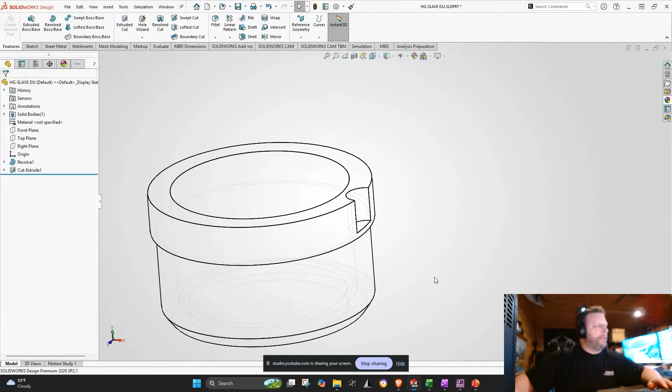Let's see. Circular. This might be a good quick AI task. I'd like to do 3. That'd be nice. How many pins do I need to get the torque I want without shearing them? Oh, why not do it on screen? Should update.

Hey, I have no idea what is going on with my camera, and I can't seem to change the settings while I'm live streaming. Whoa. That's weird. Nope, that's not what I want. I don't know why. It's totally fine if I'm up close. So annoying. It's okay, I'm ugly anyway.

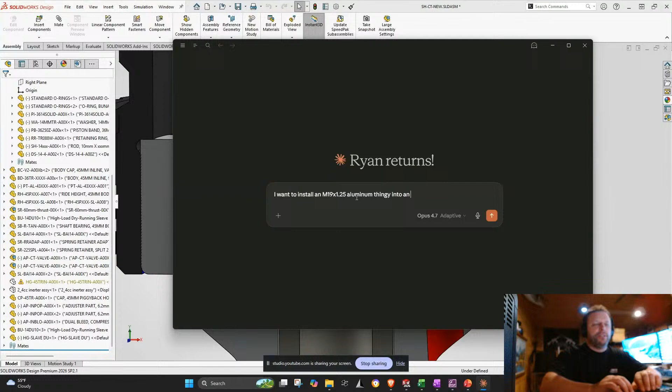So I'm going to say 12 kilonewtons. M19 by, we'll call it 1.25. Aluminum thingy into housing with, what did I say, 12 kilonewtons of pre-tension. The threads will have light lubrication.

How much torque do I need to apply, and how many, what did I go with? How many 3mm hardened steel pins do I need to make sure they don't shear? Boom. I have a calculator for this, because I've made many of these, but why not use AI, just see what it does. So I'll put 3 in there for now, and then do I have the right diameter for this? Nope, not at all. So I need a GGB catalog for DU bushing. How do you go about different ratios, or contact load variation, or what do you go for?

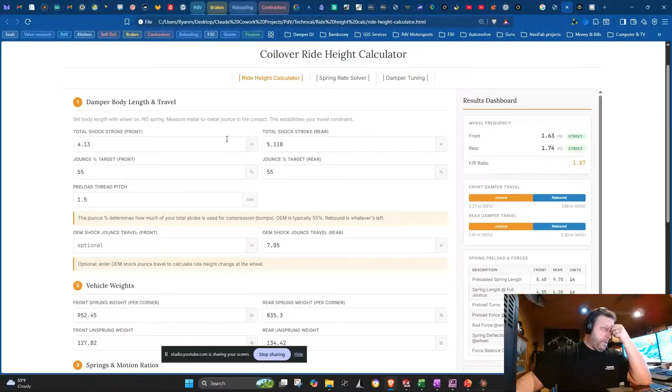And this page is really good for just setting up your spring rates. And then this starts to get into the damper tuning, so you can just play. This will be publicly available at some point soon. You can play with damping ratios, and it will generate your curve for you in real time. It's kind of nice. Hard to see. Yeah, there you go. So it's pretty cool.

And this again goes to just, there's a lot of philosophies on what damping ratios are appropriate, and it really goes to every single car. It's going to be different. So front wheel drive, rear wheel drive, all wheel drive, where the mass is, how low you are, all of that stuff. What tires you have, or what tires you want to tune for, even if you change them for street and track. And ultimately, there's a lot of compromise.

Unless you have a strictly dedicated track car and you're very consistent with your tires year to year, or at least between tunes, you're compromising a lot, no matter what you do. So it really boils down to some conversations you have to have with whoever's tuning the dampers around what you really want. And there's a lot of philosophies out there, and you may be working with somebody that's really good, but you don't like the way the car handles, and you just have to find a different guy that has a different philosophy about how to do it.

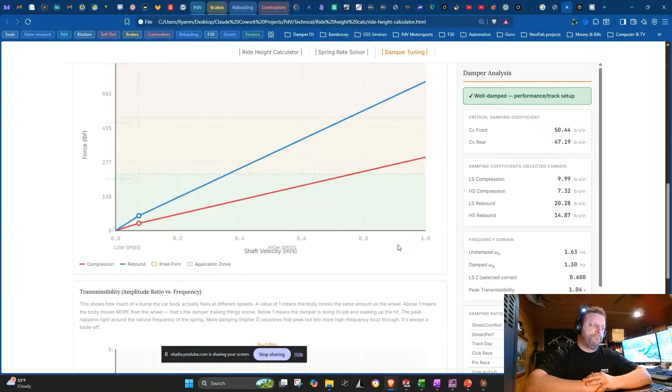And I obviously have to use my judgment on whether it's working well or not, and that's a good curve. But that's ultimately what I would like to be able to do. And then that curve feeds directly into the dyno software, and I literally just have to match it. And ultimately, that's the end goal of where I want to be. Yeah, hopefully that answered that.

I need a GGB catalog here. Somewhat. Okay. If you wouldn't mind sharing, how are you calculating transmissibility with asymmetrical damping ratios? It's mathematically difficult. Oh, I haven't even looked at that. That's pure AI. I don't even think it's calculating it right, because the curve doesn't look right to me. So this is not available. It's not posted live or anything for anybody to use. I have not reviewed it at all.

So it was actually totally abandoned, because I basically got no feedback on it when I shared a little bit about it. And then I just heard today that people that saw it were going to that person asking for it, but they weren't coming to me. So I had no idea people were actually interested in it. So I'm going to make it a priority once I get these designs out to go through it all and make sure it makes sense. AI will definitely give you garbage, that's for sure.

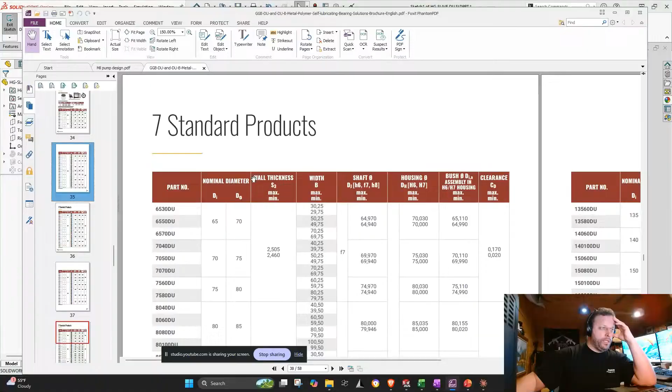No. Where is my note? There we go. GGB. Okay. These are metric. Yeah. So I need a 1410. 1410. There we go. 14.10, 16, 16.018. Is that right? Yeah.

I'd rather show. There we go. Okay. Then we have a handy dandy thread calculator. I'm going to do a 19 by 1.25. 18.866. And the minor is 17 point. We'll call that.

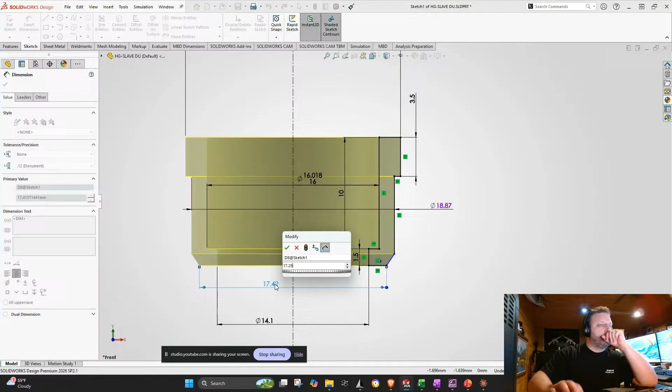Now, let's see, when you say 14, is that a full dynamic sim or just virtual sim type situation? So what it doesn't have is steering, and I don't really need that because I don't have a crazy tire model, so that definitely becomes pretty important when you need steering. So this has tire, spring rate, and damping. Obviously, the damper, spring, and inerter per corner. Then it has heave, pitch, roll.

What else does it have? Does it have anything else? It doesn't have any roll bar. I can easily add that, but I don't have that in there. I feel like I'm missing something. But yeah, I think that's all the degrees of freedom.

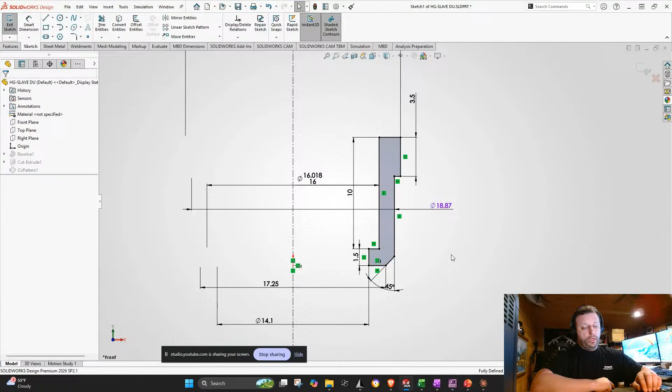And the whole point of that is that I can correlate the internal pressures of the actual damper running that track data to my hydraulic model, so that the hydraulic model performs exactly like their damper, and the inerter and the spring as well. I'll be pressure tapping all the areas around the damper to then adjust the parameters of the hydraulic model to match under the same scenarios. So it'll ideally be an almost perfect one-to-one. My simulation will mimic their track data.

So I actually don't care about this in terms of tolerances. I care about this. And I need to look this up. Leave that there.

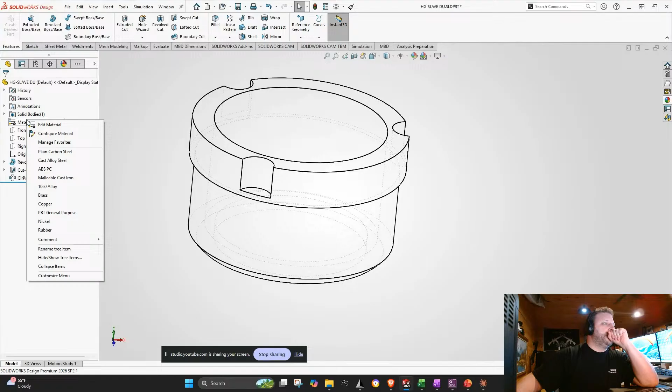I think that's pro. Yeah, I should do 10.1. We'll see. That's good. And this will be 60. Call it.

We'll go with that. I'm going to go with that because it is slightly better on thermal expansion, which would actually keep the contact with the damper more consistent and control a little bit the friction at higher temperature. All right. Okay. And I need this guy to have the same thread.

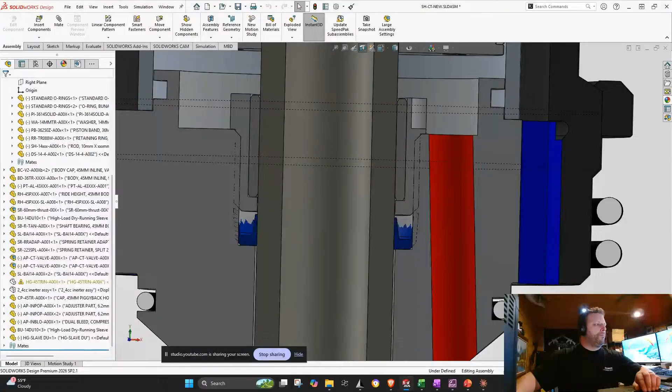Let's see. Okay. All right. Here's my thread. Well, that's going to have to change anyway. Did I make this? No. 48.1. 48.1. I should have no problem coming in. Ooh, actually. Hmm. 3 mil radial area. That's okay.

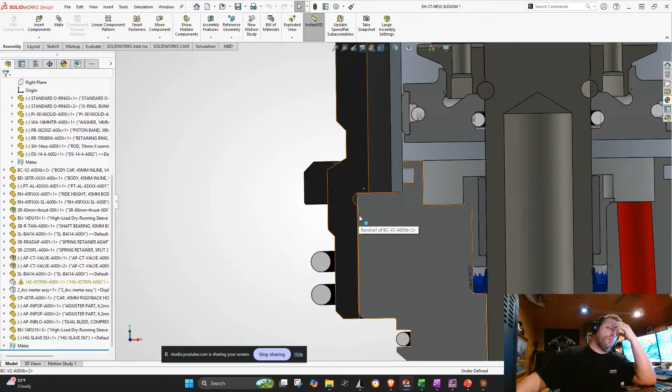Where do I want to go with this? Hmm. One and a half. Might have to change that later, but I'm going to go with that. So that's M48 by 1.5.

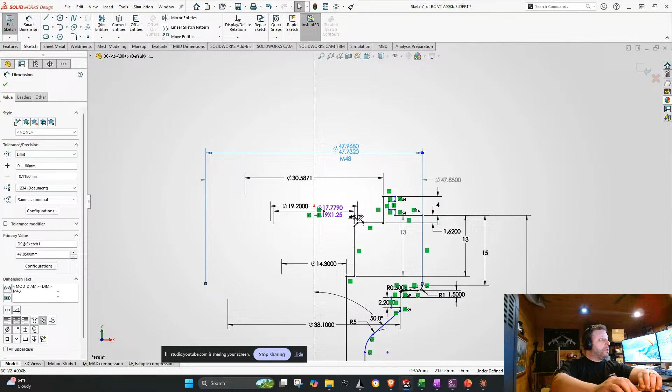Max 47.85, so 0.118. Yes. Bingo bango. M48, 1.5. All right. I need to start looking at O-rings. Okay.

All right, we're going to call this one, ooh. You could see my file names and see the customer. Not good yet. Can't announce that. Let's see. This will be PR year. There we go. All right. I have a very thorough calculator. Where'd it go? Where's SolidWorks? What the hell? Okay.

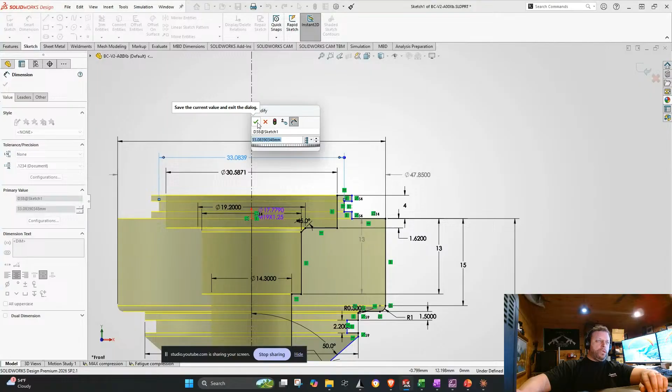So I initially just roughed these in, and now I need to figure out what actually fits. So we'll leave that there. So 36, and then this is going to be dictated by the tube, and the tolerance on that. I wonder if I have that in the model already. Nope. Shit. Yeah. Oh, where's that tube? There we go. It's gonna be minus 0.03.

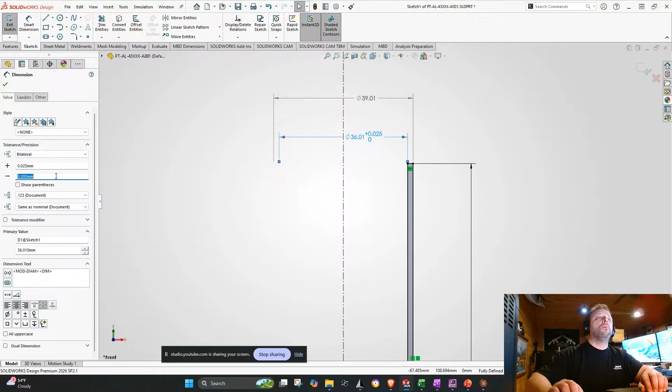That's tempting. 38. We'll go with this one for now. 36.01 and plus 0.025 and 0. So then I need that in this guy. So this is a piston, yeah. Nominal 36.01. It's not symmetric. 0.02, we'll call it.

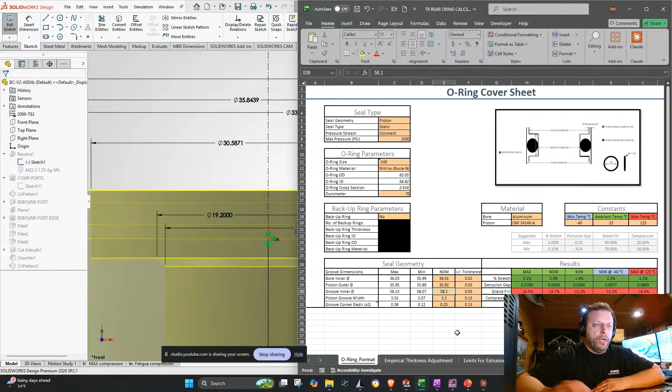Groove inner now. So start. Whoops. What am I doing? Totally backwards here. 34. And let's just get this closer. ID's 56. ID's 7. Too much. 25. 32. Getting there. Stretch is, that's pretty good actually. I think that's a winner.

So then, compression. Oh, gotta make changes. Okay, so 20. Well, let's see. There we go. 20s. It's too much. 1.9. 14 minimum. 22 max. Yeah, push it. 31.7.

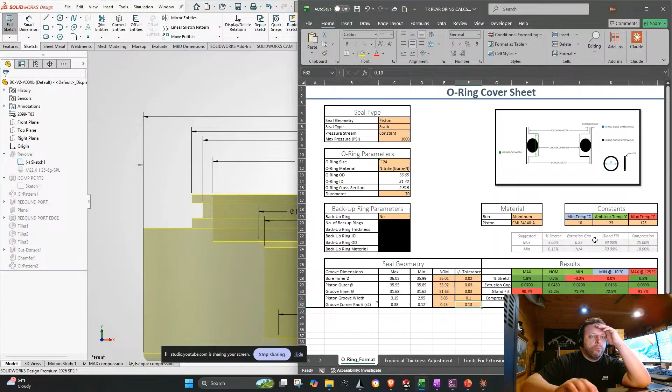Oh, the max is based on the nominal, which means max at 125 is going to be even higher. That's pretty high. 3.05. Yeah, there we go. Okay, 0.01 on the width is fine. Groove radii 0.13. Okay. So that means 0.13. Okay.

It was 31.65. Oh, shit, it's more of a difference than I was expecting. 0.03. So is it fair to say damper friction causes random micro tire contact load variation that could lower your steady state grip? Yeah, absolutely. Definitely.

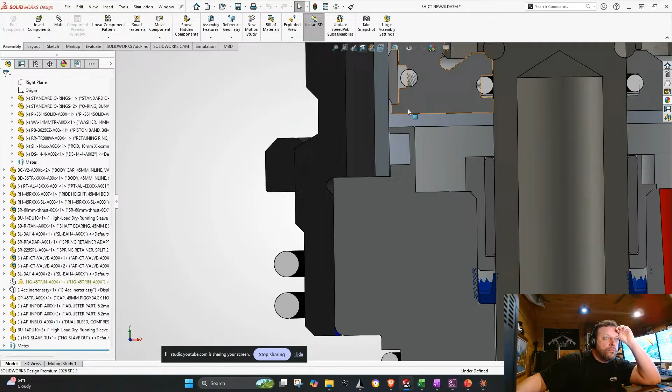Oh, this isn't tall enough. Shit. Oh, that's not good. Fuck. Not good. Not good. Oh, shit. Come on, you little bastard. Fuck, that's not enough. I need to lower this whole surface. Shit. That's painful.

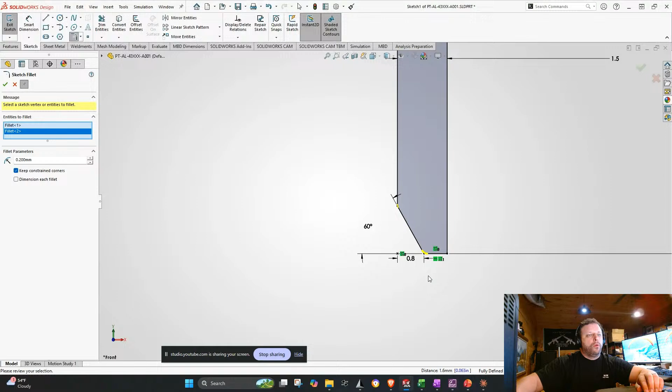Whoops. Oh, shit. There. Just half a mil. That should be all right. All right. OD is 36.65, which is right around there. Okay. Yeah, it's fine. It'll seal.

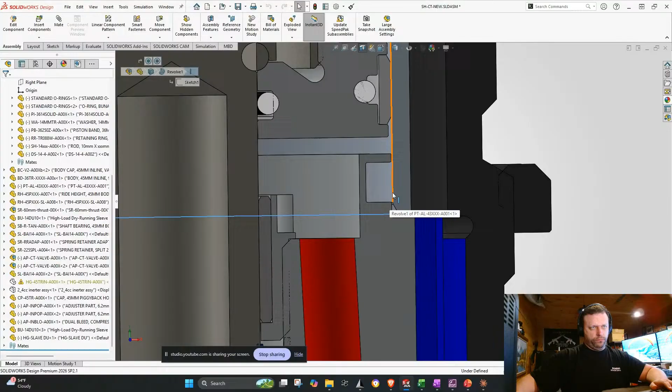That is 0.6 and 0.35. That's super annoying. It's totally backwards. What the fuck? I want that one. 0.6 should be the same. And 0.6, 0.35. Okay, now we're the same on both ends. Save. And then that is a 124 O-ring.

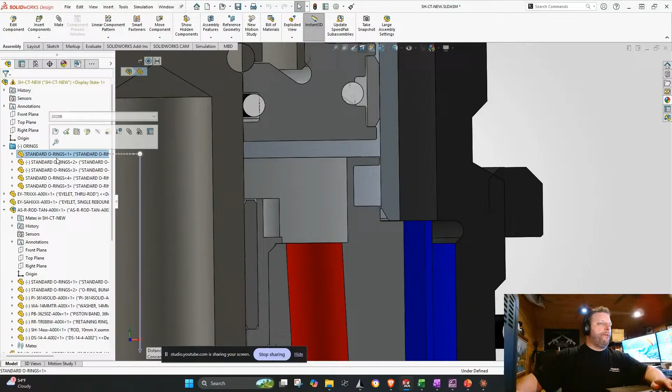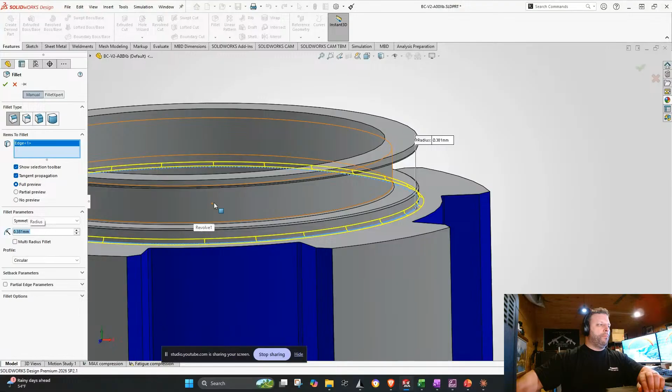Nope. Yeah. There we go. Yes. Oh, I just forget what this is. 538. I'll have to know what the standard tool nose radius is for metric, because I doubt it's 0.381.

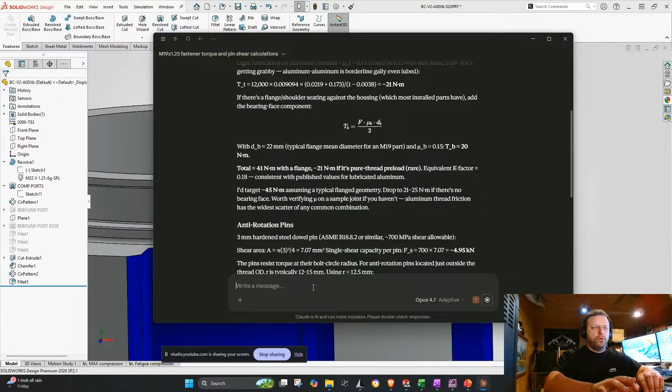What was I doing? Oh yeah, tool nose radius. What is the standard metric mill tool nose radius? A lot of years of designing shit and not knowing this. Oh, they round up to 0.4. Okay, that's fine. 0.4 it is.

Yeah. Was that enough for the chamfer? Yes. Okay. So that makes one O-ring. This is inner tube. The next one will be, I don't know. Oh, I'm not ready for that one.

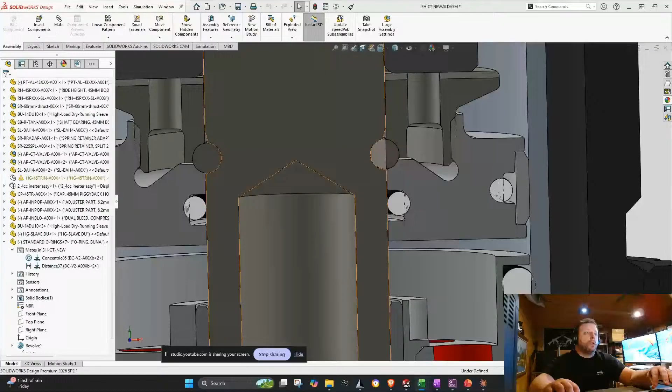Oh, this piston seal. Rename. Piston ID. So that is roughly 14 millimeters. Yeah. Piston. Whoops. It's not a piston seal in a piston, it's a rod seal. So rod outer is 14. Bore inner is 8.1, I'll say. And then see where we end up here. 17. Okay. Wow, that's pretty big.

Now I need to go down to 25, 20, 70. Stretch. Oh, what am I doing? 13, okay. So there's a little bit of stretch. And then this will probably be too much. Yeah, that's annoying to install. And again, this is sealing pressure across the piston, so it's not catastrophic for leakage.

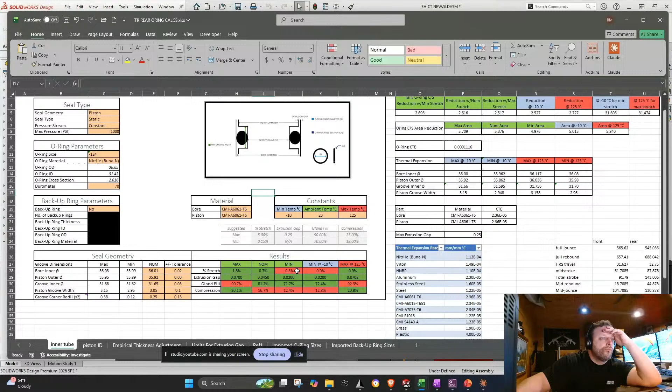Oh shit, totally forgot about this. So this is going to be the bore of the inner tube. Both of them are aluminum. Aluminium 2.3 versus 2.36. Yes. 2.2, so that's not 2.3. They're both going to be closer to 2.36, which is 6061. Okay. And we lost our min stretch. Shit. That's annoying.

31.7, 31.8. Damn it. CTE got me. I gotta redo this. 31. Okay. Oh, good. I can make this smaller. 0.7 to 0.02. So 2 is fine. No, that's not good. I gotta make this bigger. Shit. 3. Oh, that's annoying. Fifty thousandths matters, I swear. 50 thousandths, 50 micron.

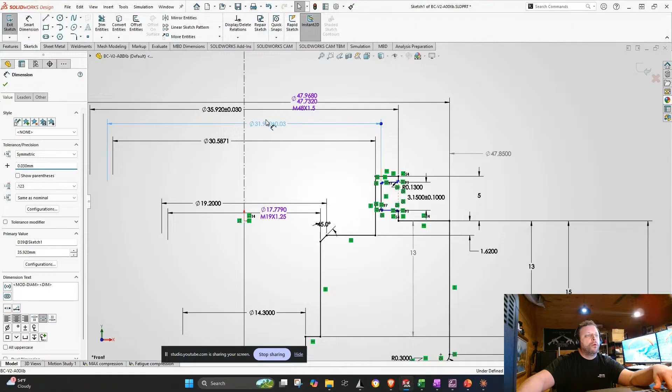Okay, so it's a 124 O-ring, which is still what I have. 124. And 3 point. Oh, why do I have that already? I made a mistake earlier that worked out in my favor. 31.9. Plus 0.03. 35.92 plus or minus 3. Oh God. Okay. We got our thread, we got our seal.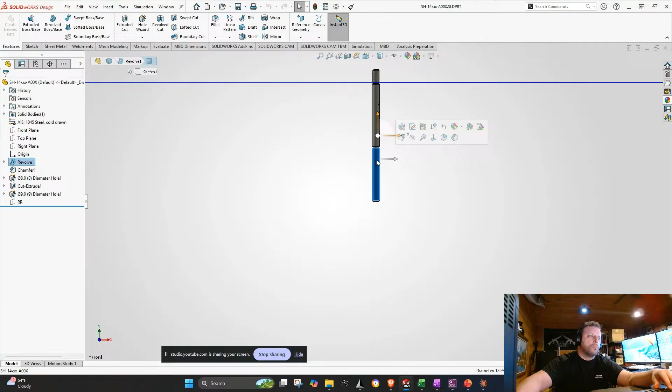That's good. Now, a rod seal gland, that's a good one, yeah. So, back to this. So the rod is, what is the rod? Nope. There it is. 13.984, 13.966. 13.97.

That's a new question. Yeah, you're back. Have you seen those dampers that build effectively inertance by connecting a mass to the low speed bleed assembly? Do you know of anyone who has done anything like that for automotive use? So the damper that you're looking at on the screen is a hydromechanical inerter. I'm just hiding it right now. I don't know what you mean by connecting that mass to the low speed bleed assembly. I've never seen it, and I don't even think that would work, but I'm open to being wrong.

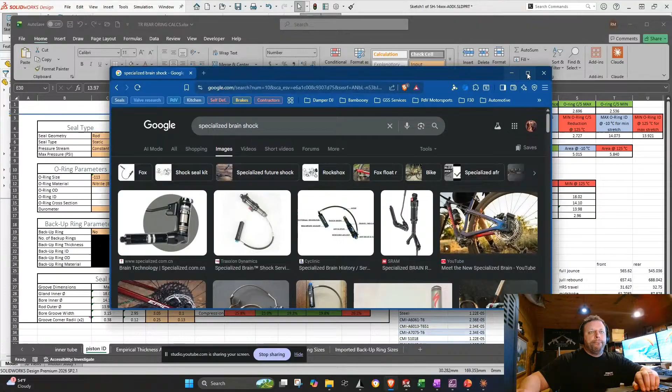984966. It's called Specialized Brain Shock. There's a cutaway on Google. All right, let's take a look. Specialized Brain Shock. Is this it? Brain fade adjust. The cutaways of the remote reservoir assembly that sits in the unsprung mass. Manual lockout levers, internal inertia valve. My marketing lingo red flag is just waving real hard right now.

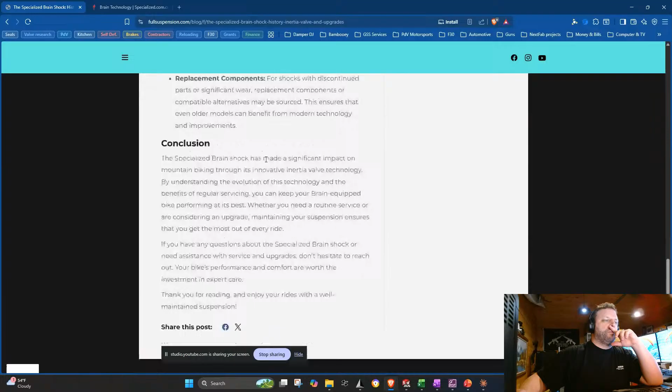All right. Spring-backed brass weight and hydraulic damping system designed to react to forces encountered by the shock, controlling the flow of oil within shock internals. So this is an inertia valve. It's not an inerter like I understood your comment to be. Penske had put some of those out for high-end customers, and they work pretty well as far as I'm aware. I was never the lead designer on any of that myself. Whether or not theirs works, I don't know.

Your question was: the needle is closed effectively, is the force varies based on acceleration rather than velocity? No, it's not like inertance at all. It's just an acceleration dependent valve, is probably how I would describe that. It is dissipating energy, it's not storing energy. The energy in the spring is just changing the performance of the valve, as opposed to the inertia actually storing energy at a rate relative to the acceleration rate of the ends of the damper.

If it's an inertia valve, it's acting based on the acceleration of the valve itself relative to the rest of the world. So if you just take that shock without moving the ends of the damper and shake it, you should move that mass on the spring, and that's not an inerter. It's cool. I like them. I think there's ways to utilize them that maybe aren't being done. I didn't even know they were doing that, although I've heard of that in mountain bike shocks before.

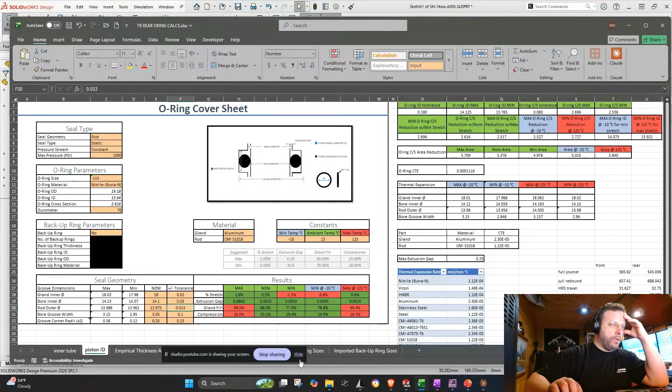What am I doing here? Where do I want to be? The rod, 984 to 966. Oh, that's not right. So I'm going to come 4 up. No. Opposite. 0.0. Where was I? Was that 9? Yeah, 9. So 5. 13. Oh, what am I doing? 984 to 966. Oh, I'm making this so hard. No. Plus. Go away. There we go. Okay. Go 5. Yeah.

There we go. Bore inner is wherever I want it to be. So 14.1 extrusion, yeah. 082 to 043. And the other aspect of this is centering the piston really well. So we'll go with 8. Yeah, that's fine. Then where are we at here? 25 to 19. So we can go 20 to 13. Yeah, that's pretty good. 112. And my gland fill now is pretty good. Okay.

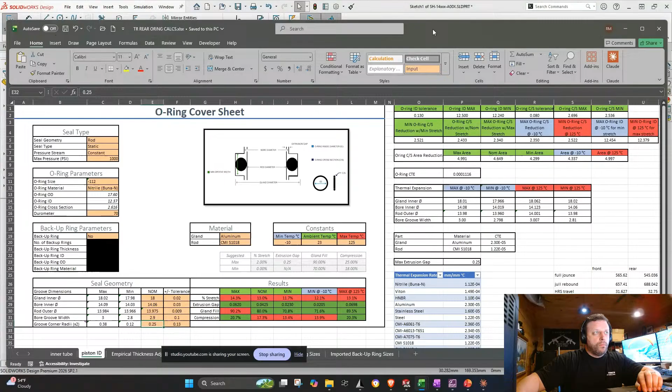All right. I'll walk through this a little bit. So this is my attempt at making a through rod that is high volume production capable. Most through rods that I've seen have a thread or some sort of need for a protrusion above or larger diameter than the chrome. And what that eliminates is the possibility of through-feed centerless grinding on your chrome, which is unacceptable for high volume production.

Ultimately, I want this company to have contracts with small OEMs, maybe like Bugatti or, I don't know, you name it, Ferrari. I'll never get on Ferrari, but for different reasons other than capability. But at that type of volume, I would still want to be able to process this efficiently, which means you would want your design to be through-fed, centerless ground for consistent quality and speed.

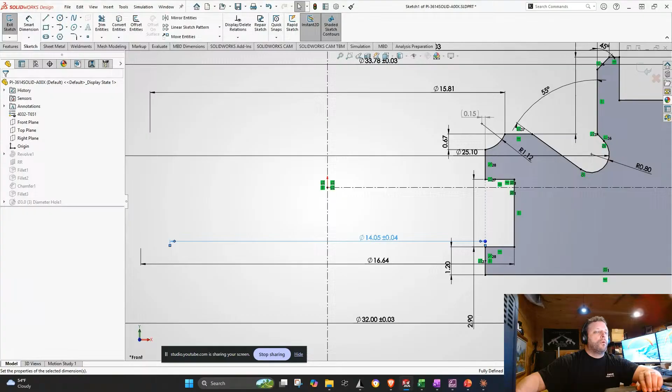Man, I feel like you're trolling me. You're not from Australia. That's a story I've shared at my day job now. Yes, I've definitely heard that. They used to have bladders that they would fill up. They'd put the car on the truck and then fill up a bladder underneath, and that would keep it from bouncing as it's traveling on the truck. That has happened. I actually found the website where they sell those bladders before, and I think they're out of business. I don't think anybody does that anymore. I've never heard anybody talk about that ever. I swear you're somebody from ClearMotion.

18. Well, it's not going to help my stress problem. Oh, that's way too much. What's going on here? It's way too much squeeze or stretch.

Definitely not, but maybe there are a few degrees of separation. Maybe someone from North Carolina. Yeah, it's real, or was real at least. I don't know if they still do it.

How did I miss this? My stretch is all messed up. Ooh, that's a big jump. So that's a 12.37 to a 13. Holy shit! Sounds like I need a metric O-ring. That's calculated, and I think I can get the same size roughly. So if we went 13. I don't think there's a 13.5. 13.9 is nothing. Is there a 13.5? The store, yeah.

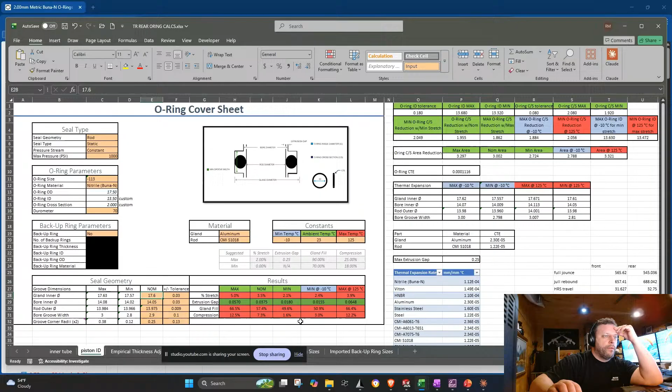Oops. Nine. There we go. That's not bad. Gland fill, so that comes down to 2.8. Nailed it. 0.4. So there's the rod. There's the extrusion. 17.2. 3.5% stretch. Reasonable compression. Okay. I shouldn't call this custom. It's off the shelf.

Okay, so 2 mil. I kind of have to figure out if they actually have a 13.5. That'd be smart. Oh, shit. Nailed it. 89,000 in stock. I will buy them all. Might as well start building my order. All right, so then that's 17.2 plus or minus 0.3 and a 2.4. Nice. Get some material back. 72, 1405. Oh.

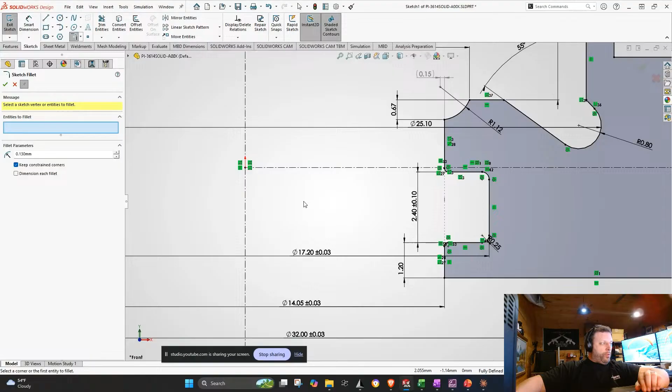What do you think about this? This has got to be boring as hell other than when you're asking questions. But that's why I'm doing it. I would love to have more people just to chat with while I'm living in my office, avoiding my family.

That one. Yeah, might as well. And yeah, might as well. Oh, damn it.

You're designing the FSAE car right now?

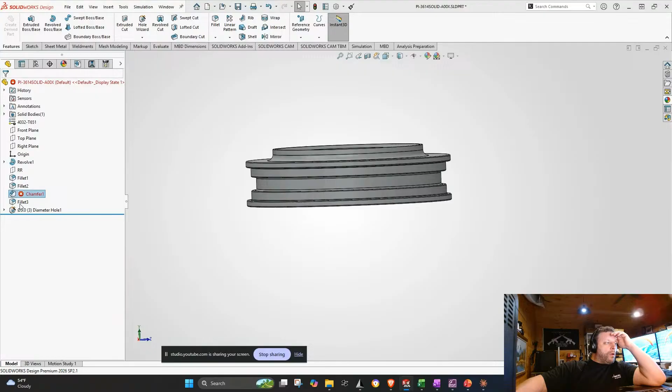Oh, I should leave that as a chamfer. Faster to cut. Chamfer. Yeah. Those two. Do that. All right, O-ring number 2 done. Let's do copy. What are we doing next? Ah, small task. Oh, shit. I don't have a 13.5 mil O-ring modeled. Oh, nope.

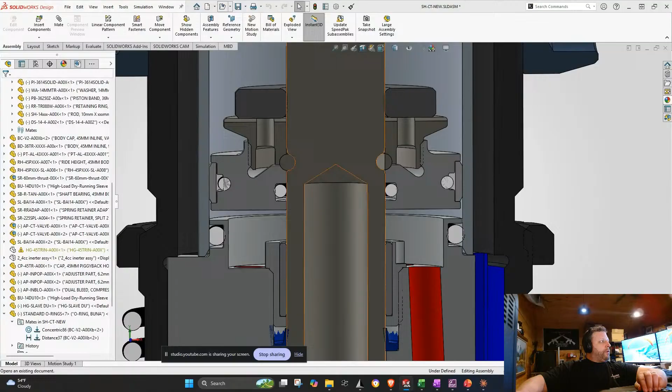O-ring standard metric. Yeah. What do I have? Ooh. Okay. 2 by 13.5. And this is not in order. Look. I don't think that search is working. And that's why it's 2.0. I'm staring at 2.5. Is the search? Okay, search works. So 2.0 by 13 doesn't exist. Okay.

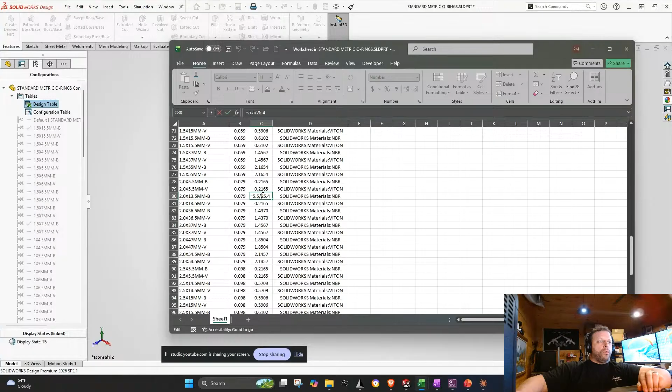Throw it right in here. Yeah. Very nice.

Yeah, that is something that's. I wonder if I can. Well, obviously I can't, but I wonder. Well, actually, so how's the CNC plotter work? Is that like a roller that's CNC controlled, a rolling cutter kind of thing? I don't even know. Like a Cricut. What the fuck is a Cricut? Cricut. Smart. Yeah, I'm trying. Okay, I get that. I'm trying to picture what the actual tool shape is. Yeah. Okay. That's cool. Yeah. I'd love to do it, but I also don't want to do the work. But yeah, I get the latest stuff does make it a lot easier. Okay.

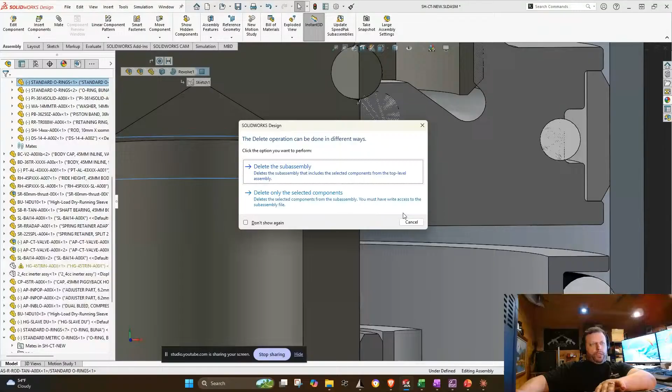Don't. I can't do that yet. I need to bring this fella into the rod.

For transferring a horrible time. Yeah, for sure. F wet layup. I remember the guys on the team doing that just for the, I think they did more than one layer, but just the skin of the car. And then they would do, I don't know if you call them stressed panels. We called them stressed panels, that honeycomb between two sheets that we then pulled the tubes together, glued it, and then let the tubes go, and you actually induce stress in the honeycomb wrapped carbon. It's not sheet, but whatever you call that. But yeah, they did that with wet layup back in the day, and that was painful to watch.

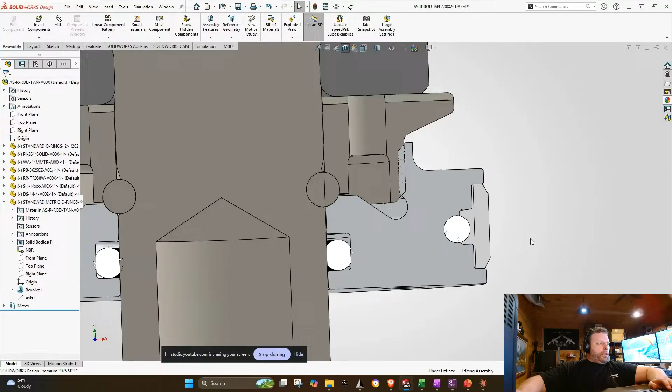Okay. Where'd my O-ring? Oh, there it is. Uno mille. Good enough. Ooh. Looks like more squish than it should be. 13 and a half. Oh, is that? No, that's right. Calculator doesn't lie. Something's not constrained. Oh shit, that's why. Oh fuck. I designed this thing in a way I didn't mean to. Oh well.

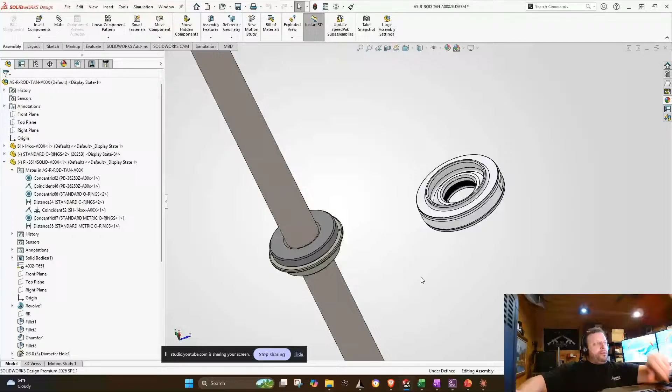There we go. So now that's constrained. Why is it that constrained? Oh, you son of a. What? There we go. Oh, jeez. What is happening? Piston band, O-ring, shaft. It's CAD tricking me. Okay. There we go. Now everything's constrained correctly. This is good modeling practice. I hope you do it as well.

Shit. What is that? Yes. Solid main. Okay. Uh-oh. Something shifted. What happened?

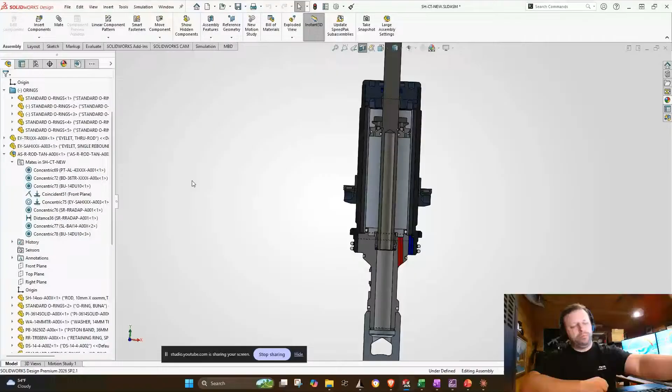It's going to be a lot of time, so I don't know if I'm going to do oils like an Öhlins oil, because they're not going to tell me anything that's going to help my inerter, because their oil is not going to be so different from any normal shock oil. What I ultimately need to find out is if I need to do something other than a typical shock oil to enhance the performance of the inerter or get it to survive longer. I don't know if I'm going to end up with a boatload of cavitation at the pump that breaks the oil down too fast or something like that.

So I'll be doing a shock oil shootout on the Emma Dyno at some point this summer with hopefully a whole bunch of donated oils, and that'll be fun. I got to have enough dampers, but I got to make a plate, and I'm going to do probably 4 up, maybe 6 up. So there'll be 6, hopefully identical dampers running different oils at the same time on one dyno, and just beating the shit out of it, and hopefully get through that test quickly.

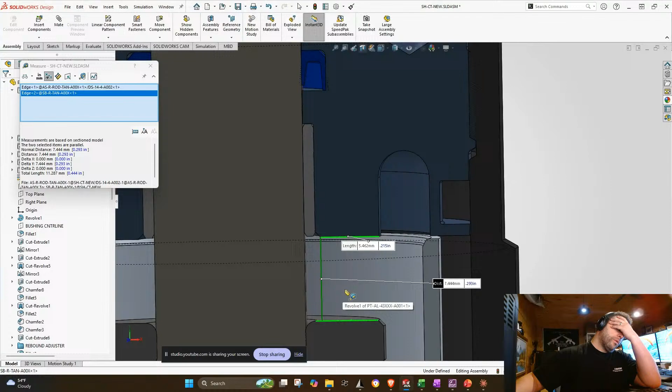Something shifted on me, and I don't know what. That is 387, 312. That looks right. Let's see. 744 is, that's 3.442, something like that. Too long now. And then got plenty of room there. There we go. 2 point. Yeah. The hell moved.

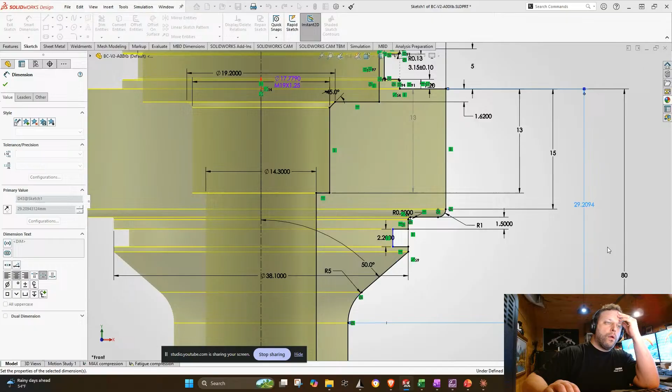Actually, that might work out well because I need to lower this anyway. That's too close. So if I could just take length out of this leg. Yeah, why don't we do that? Oh, why didn't that move? It's not mated correctly, that's why. That's going to fail. And now, yes.

Boom. Okay. Now I got to fix that gap. Shaft bearing's in the right place, and at full rebound. I'm not thinking about this right. I did not solve it. Oh, I gotta go up, not down. I need to go down here, and then that feature needs to go up. Plenty of room here. I wouldn't say plenty of room, but pretty precisely machined components.

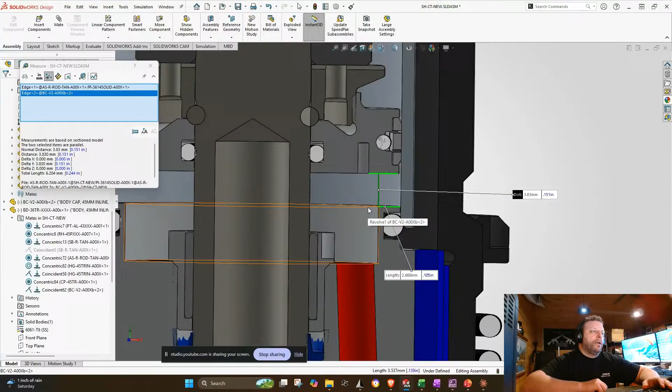Okay. Those are attached. Got a happy amount of clearance. And now we're too short.

Yeah, GPT. Very dangerous. Best bet there would be to just ask it for sources. I wouldn't ask it for its opinion.

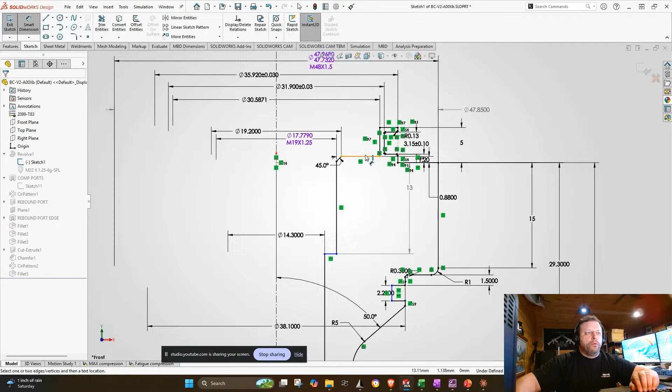So I'm going to go back up 2.5 mil, and then I need to affect something else. So this can come up 2.5 mil. That's a start. I don't think I want to do that though. 2.5 mil to there. Let's just see what happens. -2.5. Oh, that is terribly dimensioned. Yeah. All right. Okay, that puts us back to where I was.

And that gap's still there. And that looks... Nope, that hasn't changed. And where are we here? Oops. Back to 744. Okay. So now, you can see I dimensioned that to the datum, but that doesn't work anymore. So I need the seal to come up.

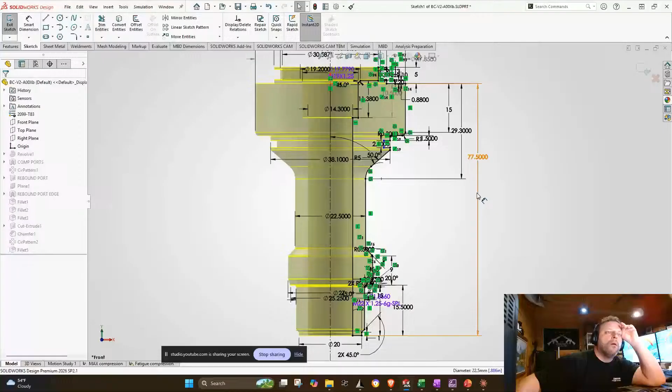Oh, I never put this back. We're getting there. That's probably safe. That's a lot of space. Oh, I believe. Where am I here? Back to that. That's not great. I just need to move the piston, I think. That's bottomed. That's aligned. I think I need to move the piston. Why do I have to move the piston? What the hell did I change?

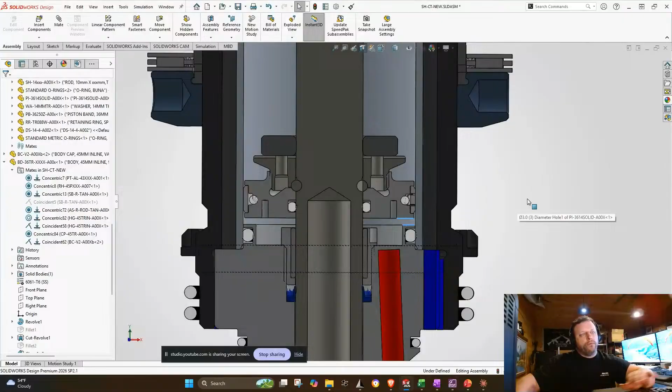So 744. What's the difference here? That's 133 and 744. So then I'm gonna do, yeah, 1 3. All right, it should be a little over 4. Oh, yeah, 4.3. Yeah, plenty of clearance. And yeah, oh, split it pretty evenly there. Okay.

What next? Guess I should make an eyelet. And I should make this fit the new shaft. Hmm. 1 second here. Oh, shit.

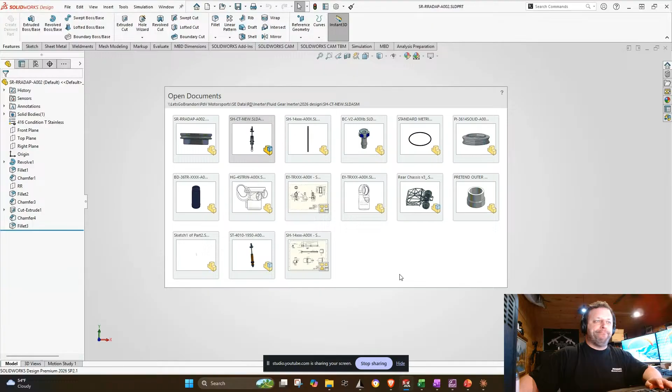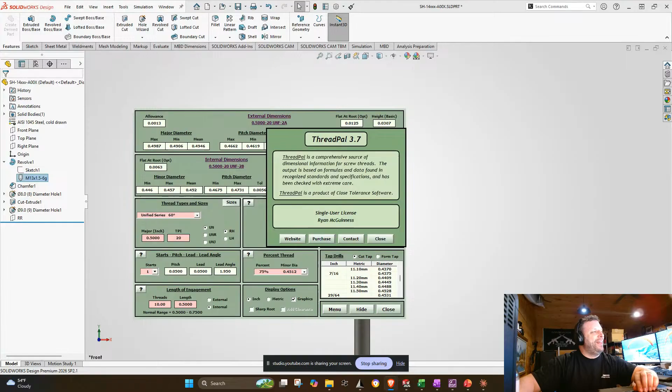Oh no. I was wondering when this might happen. I think they went out of business. Oh, that sucks. Expired domain. ME ThreadPal. I've been using this for probably 15 years. Every company I've worked for, I made them buy it for me. It's so good. Because I always do custom threads for the stuff I typically do. It might be, maybe they just moved away or somebody bought them. I can put it in the chat, I guess. There we go. That site works for some reason. Highly recommended. Super cheap. The whole FSAE team should have them.

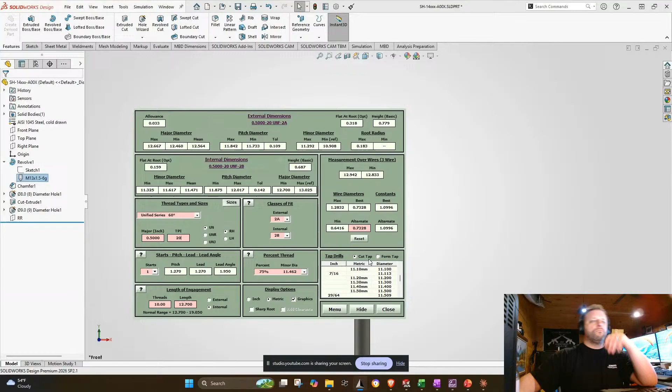My computer is lagging right now. Here we go. Yeah, 1/2 inch 20. Is that right? I just posted about this. I can't remember. I decided on it, I guess, and I didn't make the design change yet. What did I say? Oh, God. Here we go. All right. Oh, I did say 1/2 inch. Why would I go that small? It's pretty small. Certainly doable.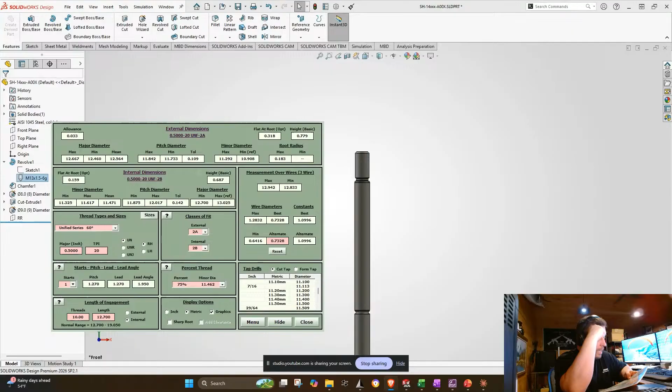Yeah. So M14 is called M14 by 1.5. And then the major diameter is under 14. 13968 is not small enough to avoid the centerless grinding of the chrome. Right, that's 13966. 13.9. Yeah, so you'd have to do a max. You still have plenty of room there. Yeah, we're doing a modified thread, but it's still an M14 by 1.5. Well, I can't say all go no-go gauges will work. It'll at least be a standard thread. Standard thread is M14 by 1.5 standard? Probably not.

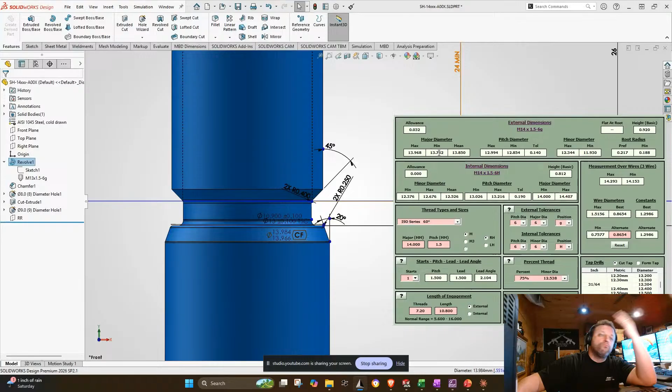Now, external, I could do. Nope, what am I doing? That's the pitch. That's not what I want. I don't really want that either. I'm just going to dial it back. So 13,966. So I'm going to make a max of 9. Max of 9. 13.9. Yeah.

What is that median? 13.9 plus 13.732 to 13.698 and plus, or 816, and then plus 13.9, so 13 plus... what am I? 13.732. There we go. All right. There's my special thread.

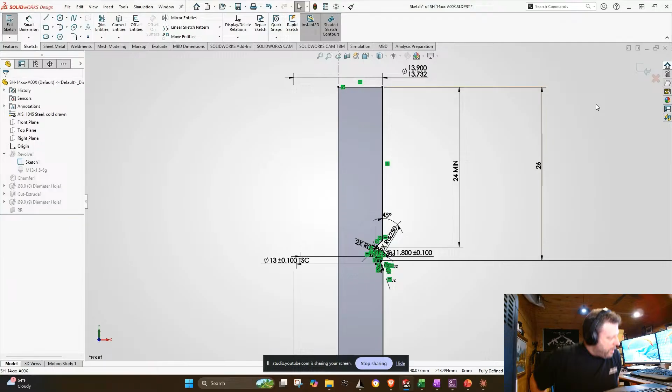That's what it was. I came up with a stupid custom thread, and the tooling that I'd have to pay for tooling to roll the thread, which is what I want to do. Now, even though I'm constraining the maximum major diameter, they can account for that and still use the standard M14 by 1.5 to roll the thread. So it will be a little less expensive for me than what I was doing. Awesome. And still have basically the strength of an M14, which is spectacular. Yeah.

Now that is M14 by 1.5, 6G rolled. Major is 13.9. I think you have to double check that mod. 13.90 to 13.732. Yeah, whatever. I gotta look that up. I'm pretty sure there's a specific format in ISO specs to how to write that. Okay. 1.5, 6G.

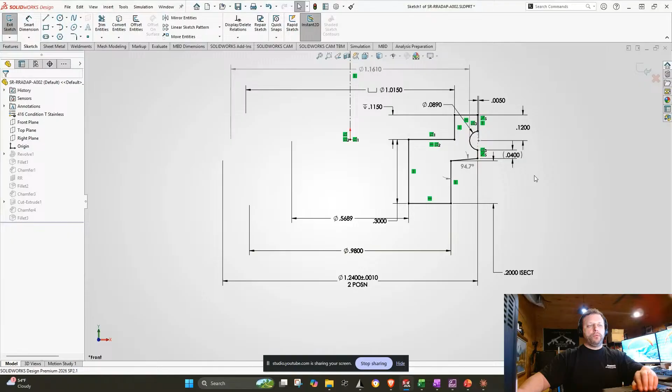Now, I can fix this. Drawing's already made for this. That will be nice. Oh, drawing was made for this when I worked in the Freedom units. So that will have to get fixed. Yes, dimension. Remove. Okay. The minor diameter is going to be... Come on. What is. That's the one. I don't know why they don't give me the median, the mean minor diameter in this software. I don't need that. I just need... Not for drawing.

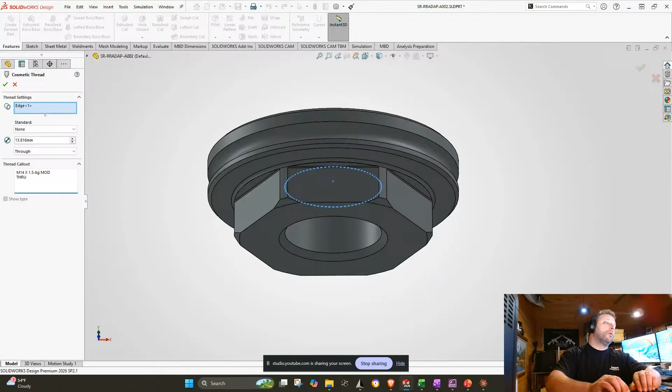Forget what I put. 13.9 plus 732 divided by 2. There we go. Ba, ba, ba, ba. My chamfers aren't big enough. Oh, what material? Of course, I closed it. 416. 416. I'll have to think about that. All right, that works.

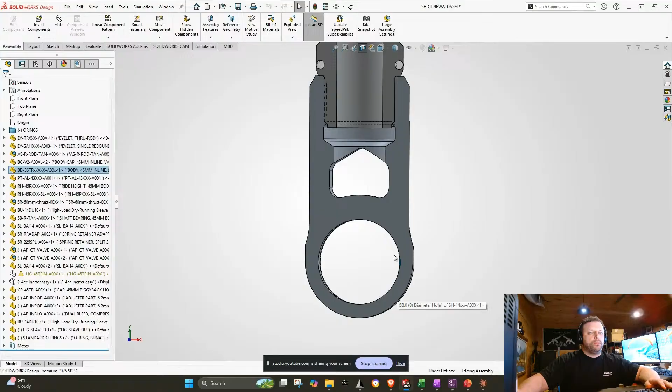To work on that. Now the eyelet. Let's see. This one is quite a bit longer than the other one needs to be, so that's 55.58. Oh, it's not that much longer. 50.8. Ooh, I could use the same eyelet. Nope, I can't. That's a totally different diameter. All right. It's a silly problem. Let's do this one here. This already. So there's the handy dandy calculator. This is going to be called...

I'm so used to day job active suspension called CP and VP, which is not what this is. Close. The fun part of making your own shit in a way that's never been done before. Well, I can't say never been done before. It's just a different design. I don't know what it's called. TBD. Think of something there.

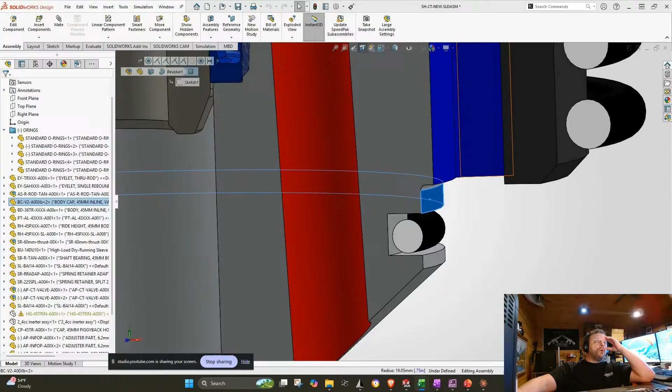So I know I can't change this. 38.1. So that's 38.1, and I'll make up the rest. 38.1. I'd like to go loose here to make it easier, quote unquote cheaper. So 38.1, and then the bore would be 38 point, I don't know, 38 point. Yeah. Okay, and then 36, let's say.

And, oh shit. This hopefully will be easy. Get this back to referencing the cells. Did that change? 17.12. Yes. Okay. 23. 31. This is another one that is just internal sealing. So I want low compression, high gland fill. Stretch is in the ballpark, so that's not enough stretch, so we'll go with that. And let's see. Oh, it's going to change a lot.

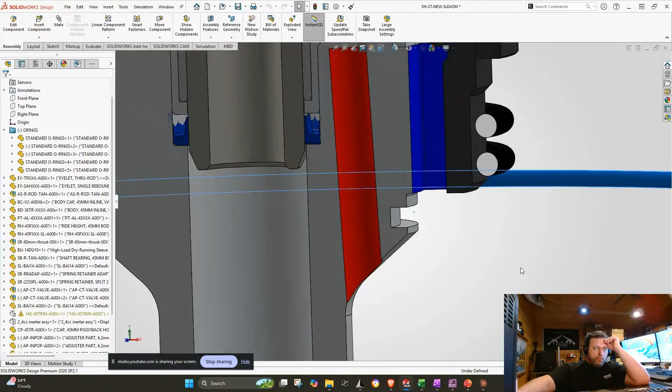Oh, these O-rings are bigger than metric ones. I should probably use all metric, huh? Have better control over cross section. It's annoying how big this gland has to be. So big. Let's see. So this is going to be a 21.25. Actually, 20. Who's that look like? Yeah. Let's go back to the 20.

Oh, 39? No. 34, 27, 33, yeah. So no compression is because this is 30. Let's go 35. Too much. 35. 35. Yeah, that's pretty good. Then that's a decent amount of stretch. That's the money shot right there. Gland fill now 2.4. Nope. 3. Yeah, it's such a huge range. 8. For sure. Okay. Good stretch.

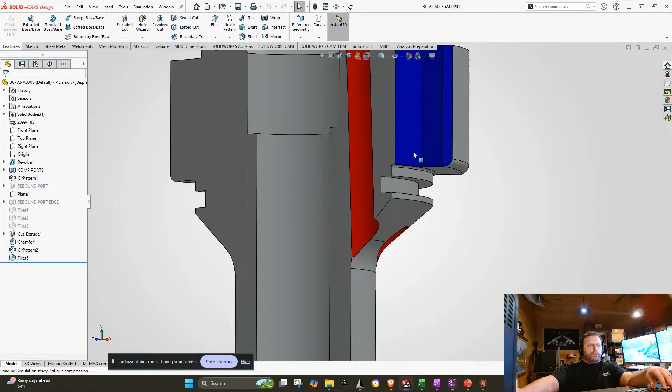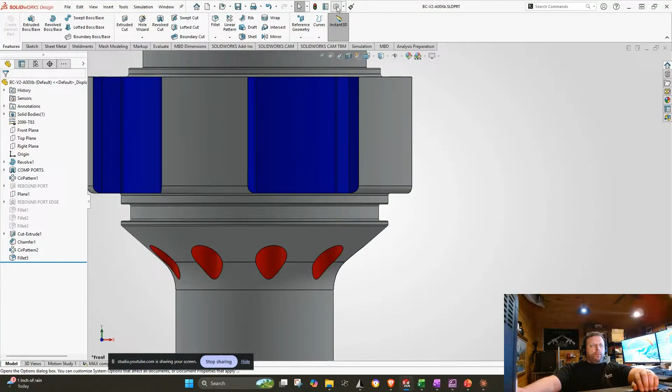Oh. Two point 3. Oh my god. What the fuck are these settings? 38.1 plus or minus 0.06. Okay. And that's 35.4. .03. 0.25. Do do do do. What is with these? Very nice. Yes.